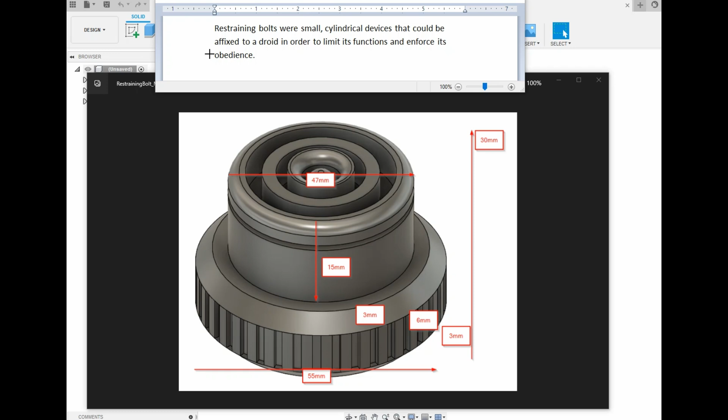Okay, this is our restraining bolt, and just so you guys know what a restraining bolt is - restraining bolts were small cylindrical devices that could be affixed to a droid in order to limit its functions and enforce its obedience. I think that's pretty funny, so I wanted to share that with you. All right, let's get that out of here.

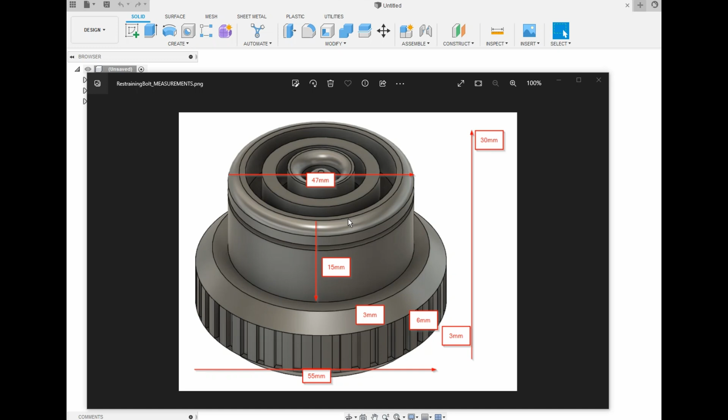Fun and games. Here's the restraining bolt we're going to design, and I put some measurements here. It's going to be 55 millimeters wide here, 47 millimeters this wide and 30 millimeters tall. And then little dimensions going in here. I made this a little bit more complicated, but it just kind of circles, so we don't have to go in that much depth, but I'm going to try to design it just for you guys. So we're going to have 1, 2, 3 rings and the middle ring over here, and then these cool little indentations. So I'm sure you'll learn a lot.

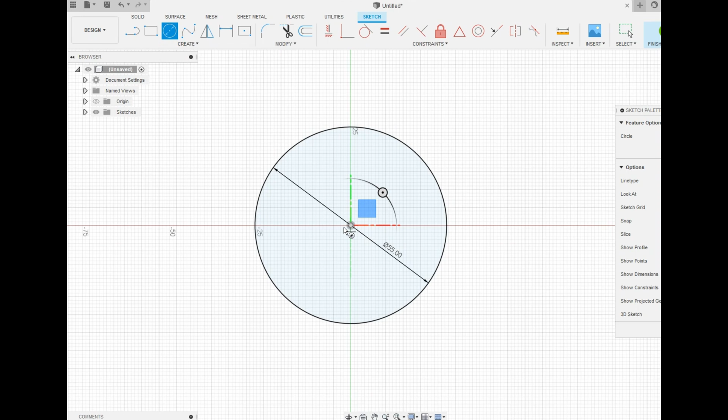Okay, let's start. Create a new sketch. First thing we're going to do is create a circle, and from my previous diagram, 55 millimeters. There you go. Next thing we're going to do is create another circle, 47 millimeters. There we go. We got 2 big circles already.

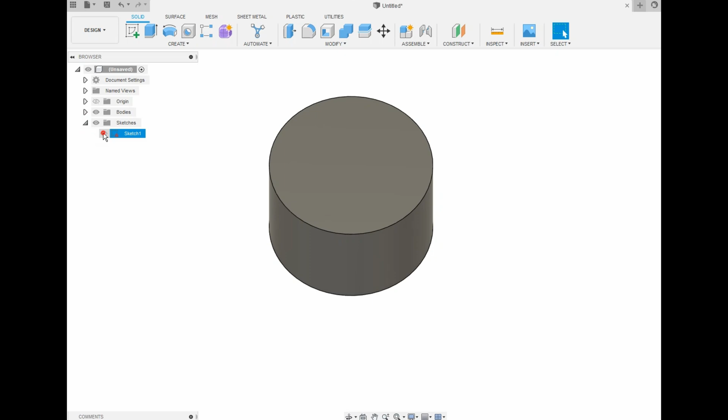All right, let's get going here. Now the total height of this is going to be 30 millimeters, so we can go here, extrude to 30. And then we're going to extrude this part to 15. So we got somewhat of a little restraining bolt looking thing. All right, there we go.

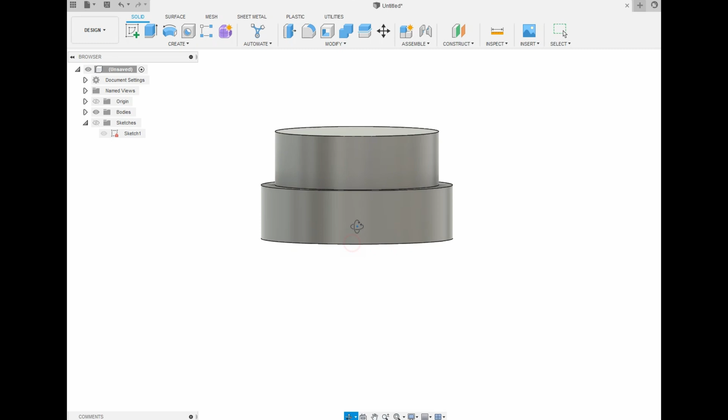Okay, let's shut off the sketches so I can see better. Now, next thing we're going to do, let's get this side part. This is probably the most complicated part about it, so this is where the fun begins. The rest is kind of just circles, and we're going to extrude them in and cut. This is the meat and potatoes, I would say, right here.

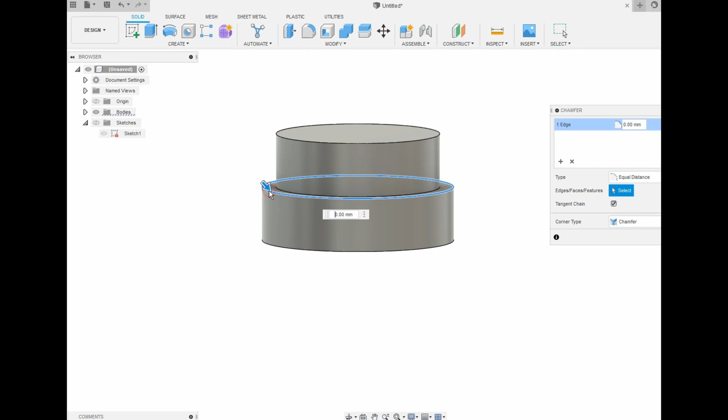First thing we're going to do, let's do this. I'm going to get that off there. I'm going to take this and chamfer it - not the fillet, I always click on that by accident, I want the chamfer. That's the one I want. Let's do 3 millimeters on there, and then I'm going to chamfer this one over here too. Chamfer you and you, let's go 3 millimeters. There we go, perfect. It's starting to look more and more like it.

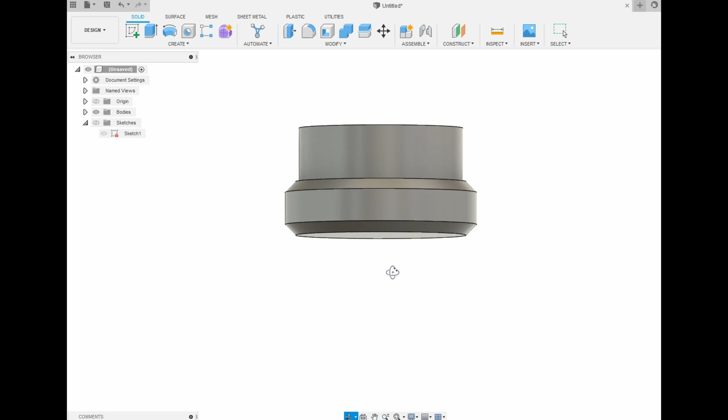Okay, now you got to get those ridges in here. How are we going to do that? I'm going to turn it on the bottom like this, and move you over here. Now what I'm going to do is create a new sketch right on the bottom, like that. We're going to work from our bottom to the top. I'll show you what I'm going to do in a second.

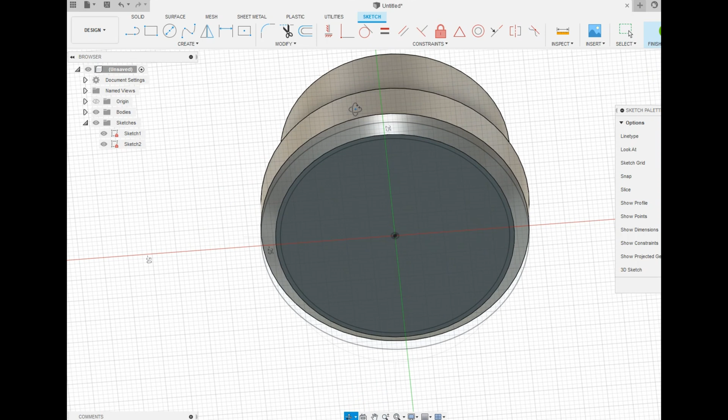Since we know this is the bottom, let me show you this. This is the one we want to cut into, not this circle, not this one, it's this one right here. So let me go back there, so this one right here.

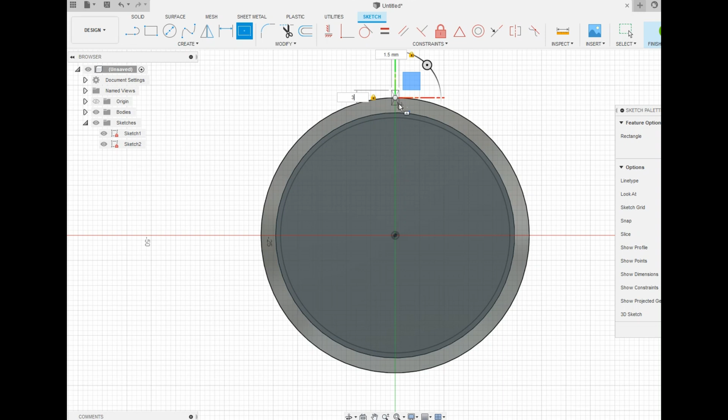So let's draw a square right on the outside, and I only want it 1.5 millimeters, I think that's big enough. And on the inside, we only want it another 1.5 millimeters. Since I put the square at the edge, we have to do 1.5 millimeters, so this would be 3 - if this is 3 millimeters, obviously 1.5 here, 1.5 here. The one we're going to be concerned about is this one here.

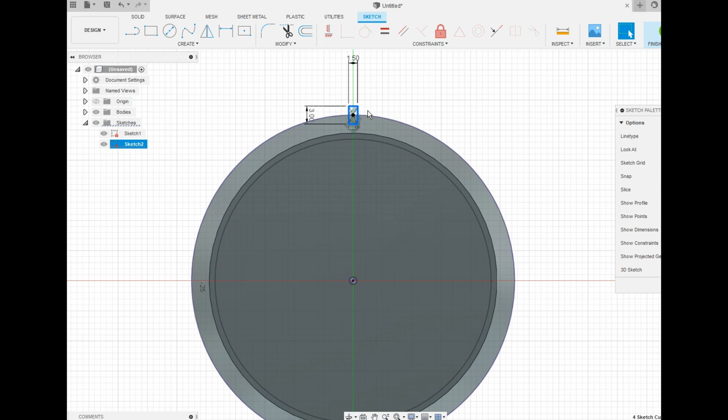So let's go here, and just to show you real quick, I can back out of here. If I just select this square, I want to extrude this, and you're going to see it's going to go up. Let's watch. Let's get it right there. See that?

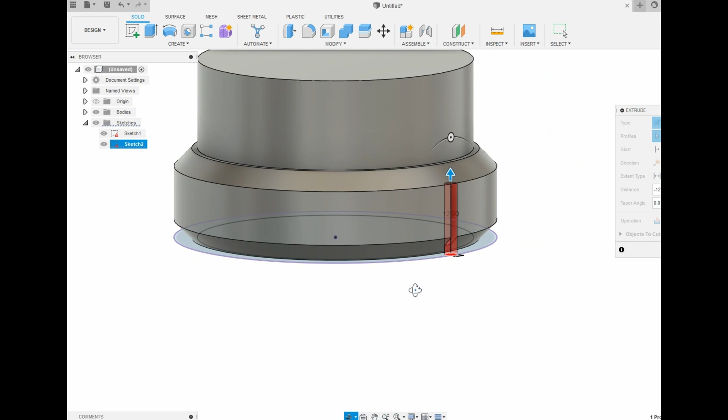Now I don't want to do the bottom too - I don't want to do the bottom at all. So what I'm going to do, I'm going to show you an example. I'm going to just do the two sides again, and come right back up here, and just go a little bit more. Oops, there we go. Make sure we're right on target here.

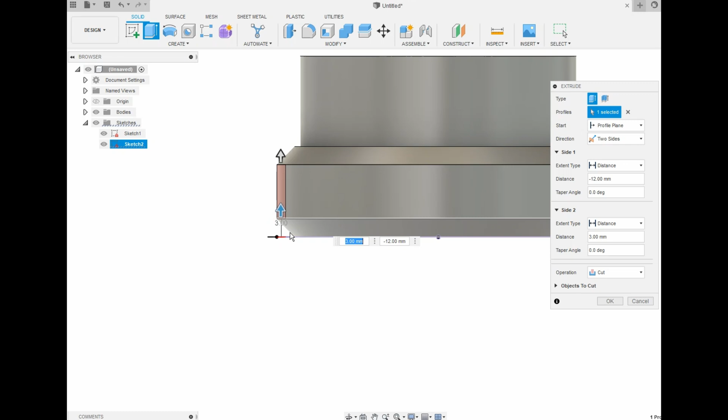Right there, so we're perfect. We're just going to click OK. And I can show you—I'm going to turn this around. We got one little edge right there.

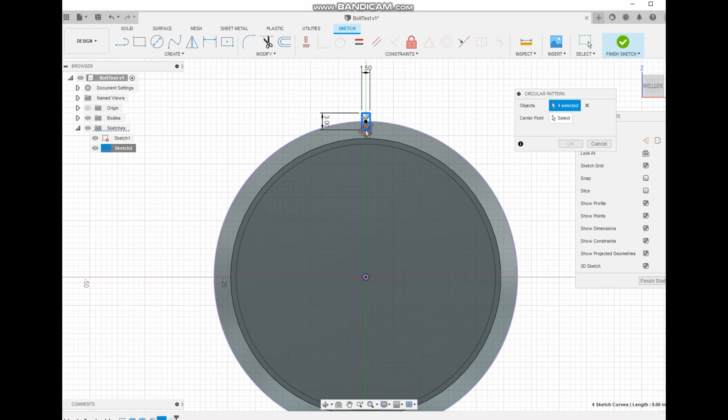See? Now we're going to replicate this cutout all the way around. Let's get him positioned properly, and we're going to edit our sketch again and create a circular pattern. The objects we want is him—just double click on him. And the center point is going to be him.

I know that if we add, let's say 42, that's not close enough. Let's say it's 60—yeah, that looks much better. 60 is really cool, we'll just click OK, and then we got a nice big pattern over there. That's a lot of them, right?

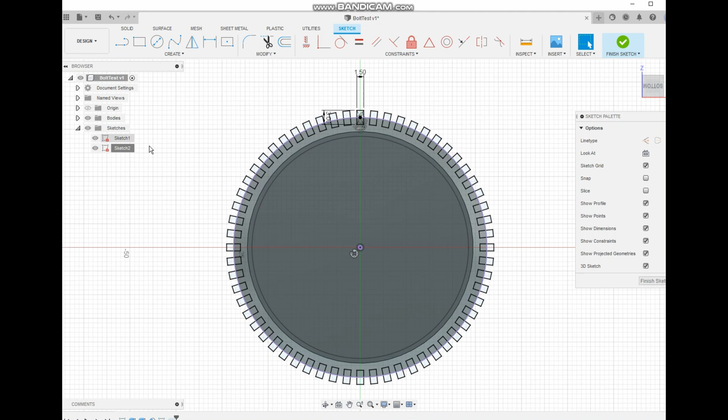So let's select all of them and then do the same thing, extrude. Okay, let's select everything. But before we select everything, let's shut off sketch 1, shut off the bodies, so we have less to highlight. Computers take a while because it's a lot of points.

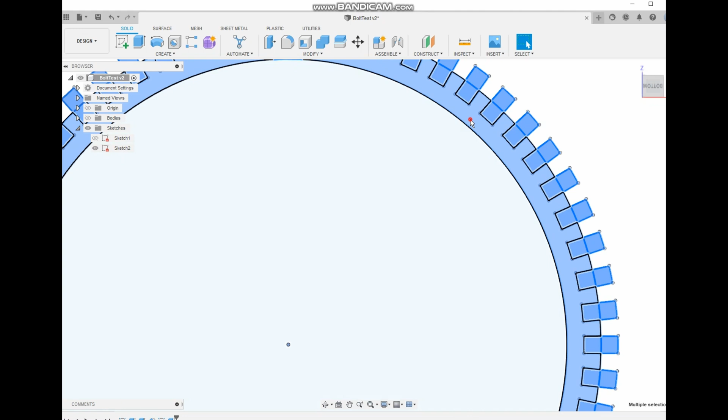All right, so get rid of this one. Let's zoom in and get rid of this guy. So that's what we want to extrude. So we're going to extrude and go back to the body, and then I'm going to orbit it correctly.

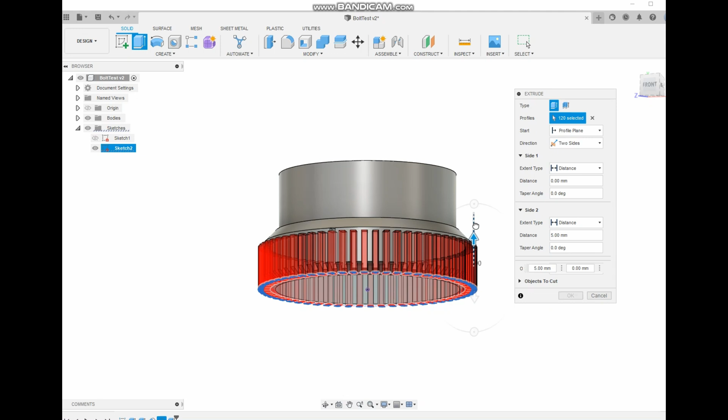And then we're going to do that two-sided again—two sides. One will be all the way up top. Oops, let's get a better view. One will be there and we'll do the bottom, like that, and we'll do the top. Right, oops, and right there—there we go.

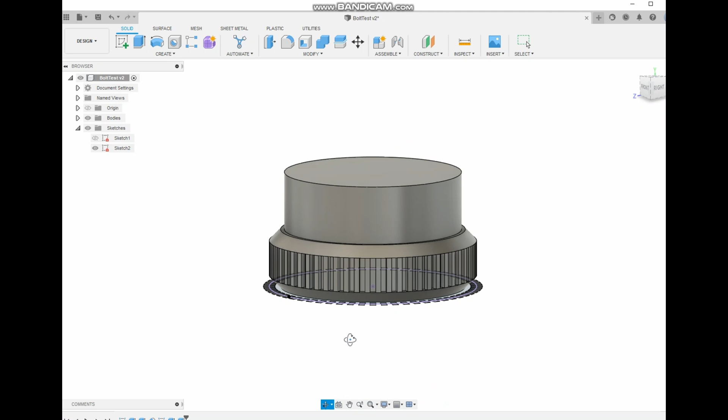Let's cut, see how it looks. Boom, how's that look? Pretty straightforward, right? Let's shut off the sketches so you guys can see it better. Perfect—now that's starting to look like a cool looking restraining bolt.

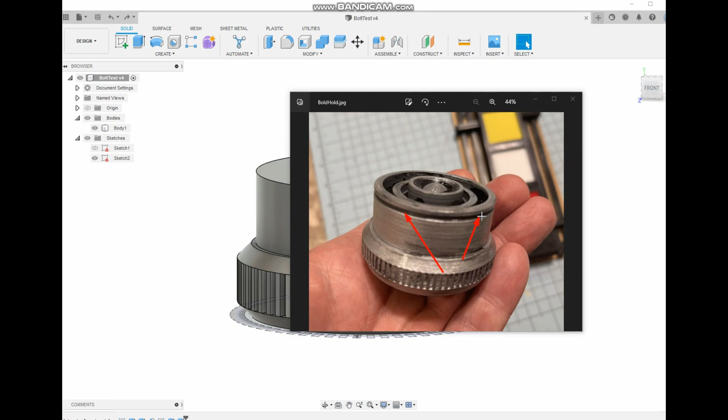Next thing we want to do is, see this little rim right here? Let's see if I can get one of these tools. See this rim right there around the whole restraining bolt? Let's create that right now. Get rid of these. Let's create a sketch right on top of our bolt so far, a new sketch right on him.

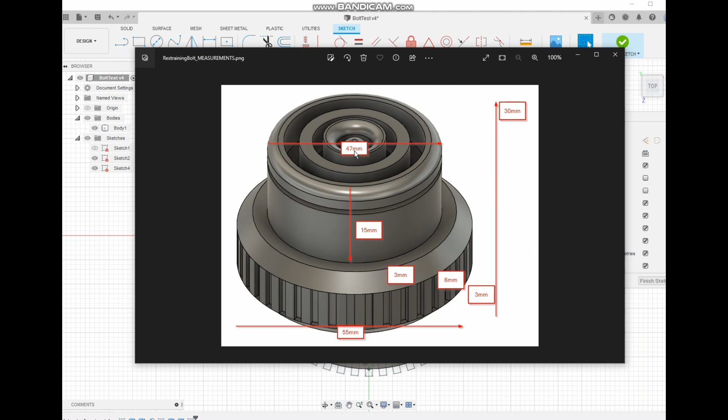Let's create a circle. Now remember, this outer one here is 47 millimeters. So we're going to make this one circle a little bit smaller—we'll make this 46.

And then we're going to make another one—we're going to offset that by 2. Let's press the O button and offset that by 2. I'll show you what I'm doing in a second. And then we have this ring here.

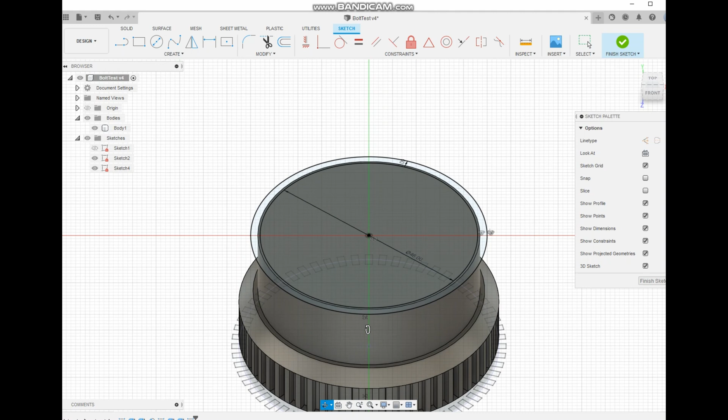Now we're going to extrude it. Make sure you click both this and the other one in there. We're going to come down as much as you like—we're just going to put it right here. And remember, this has to be two sides, and we'll make it like that. Looks good, and we'll click OK.

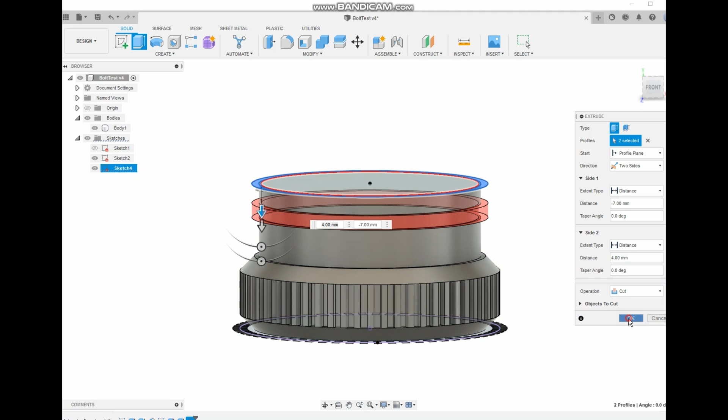And boom, you have an indented ring. It's very similar to this one over here. Okay, now working on this area—we can do a couple more circles and we are done.

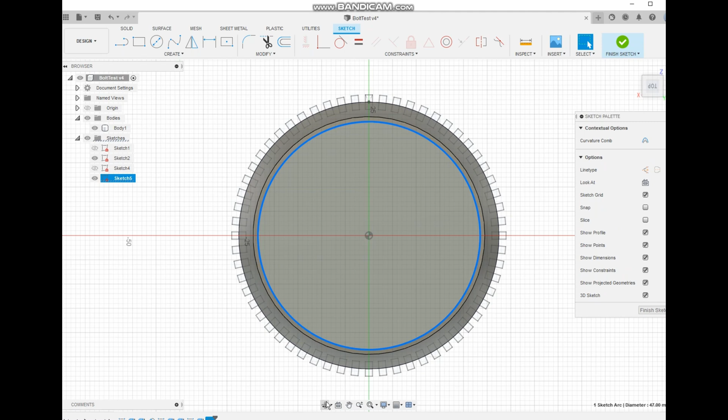So let's create a new sketch, put it on him, and now we're going to make this outer portion of the ring. So we click there, and I'm going to show you like this. I'm going to do an offset from here, press letter O, and make it like 3 millimeters. There we go—take this middle, extrude it down, and we'll go 10.

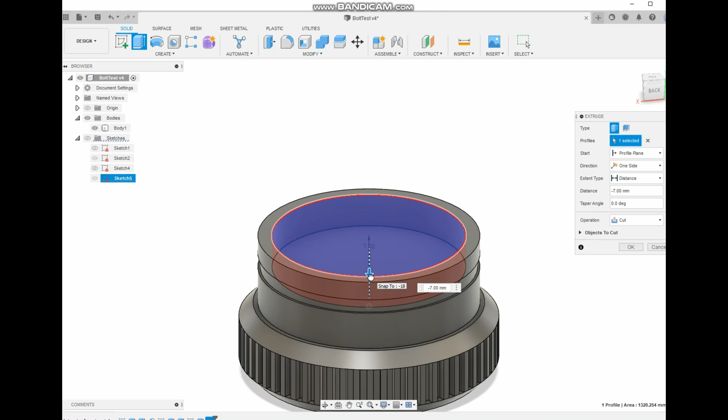How's that? Nice and deep in there. We're not going to make it that deep—let's make it 7, that's good. All right, we got our ring.

Move this up here, and now we're going to take this outside, make it a little bit prettier. There we go, just like that—it's got the outside done.

Let's go back, create another sketch in the middle. Go right to our circle again—this is going to be, we'll just make these random numbers. I'll grab 34 like that, and do another offset. Make this 2.5.

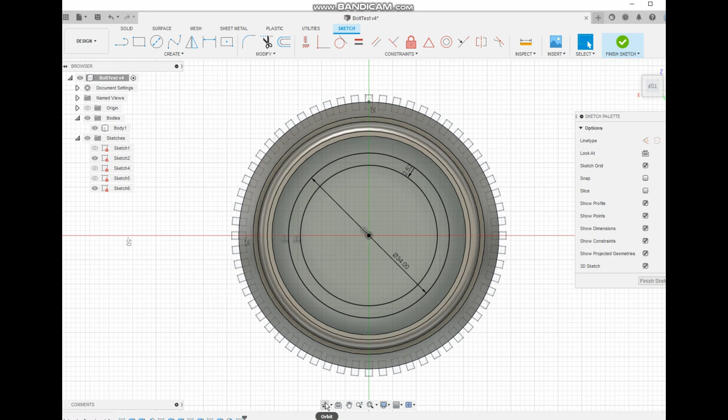Boom, and now we're going to extrude this up like that. Let's see, make that level. Yep, that's good right there. Click OK—starting to look, getting more closer and closer.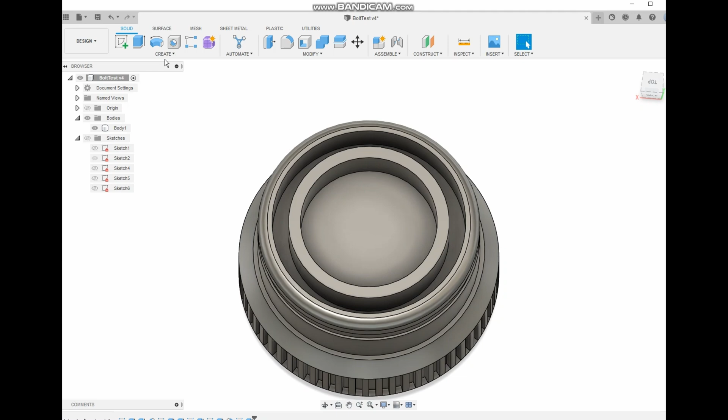And we'll just do the final ring in the middle—another sketch right in the middle, another circle. We'll make this one 18, and we'll offset this guy.

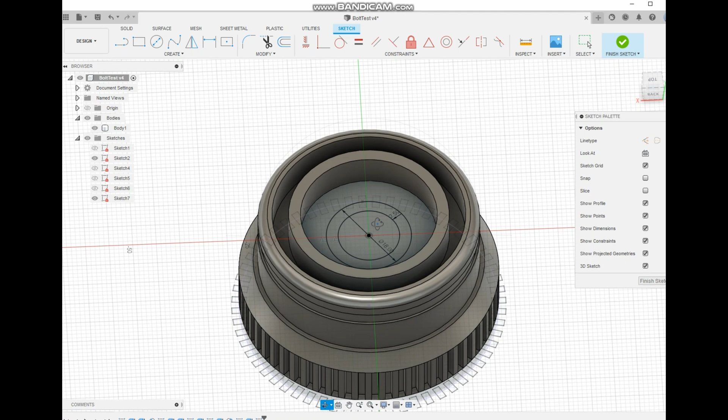And offset him by, let's do 2.5 again. There we go. And then we'll just extrude him up like this.

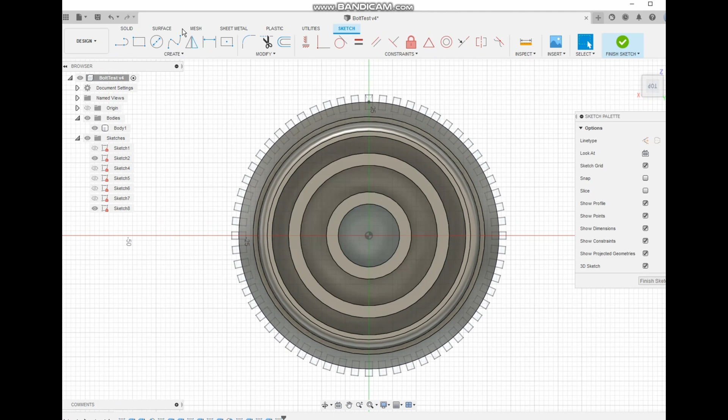Again, looking good already, and we got one more circle to do in the middle. We'll create a new sketch, put it right in the middle. This is the one that's going to have kind of a bubble end. We'll make it 8.

We're just going to extrude the whole thing this time—up, like so. Actually, we're going to make him a little bit lower, like that.

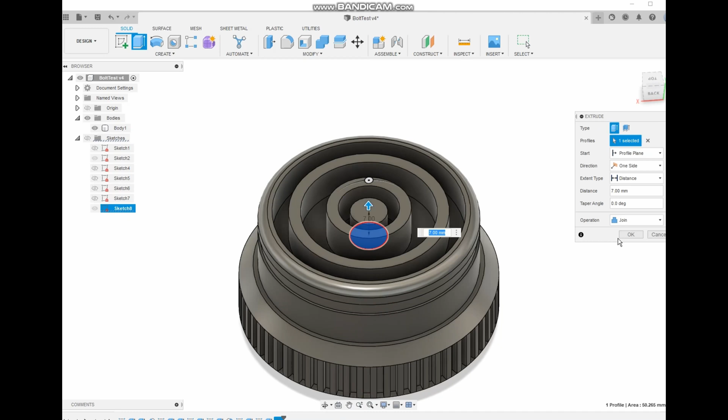All right, now let's take the edge—you can click on him. We're just going to, let's see, make him more round, like that. Boom.

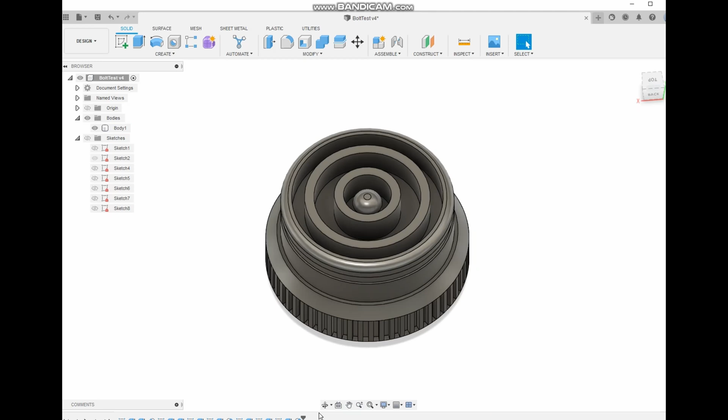There we go—nice, pretty restraining bolt. All done in Fusion 360. Now, once you create your own restraining bolts, you can turn this around, cut a hole in here, add a magnet. You could actually put a hole through the whole thing and, I don't know, put a tube in there, maybe rotate it, do anything you like.